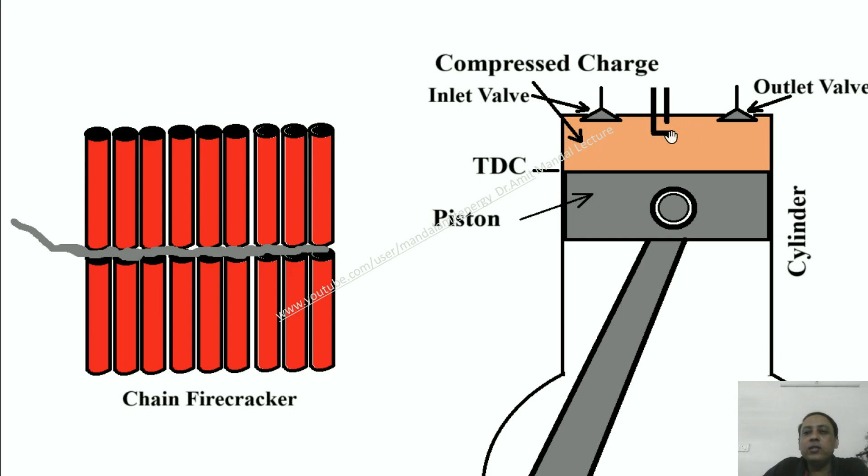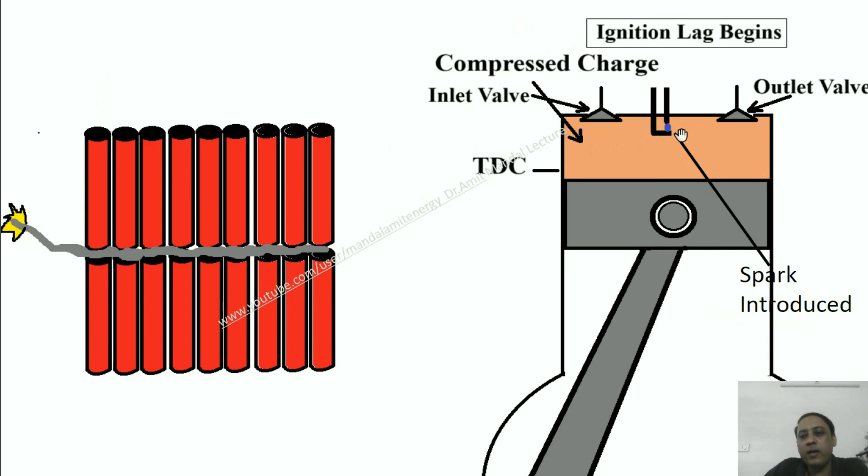You can see that this fuse is ignited and here the spark is introduced. So the flame is going to the first cracker, like saying that initially it was spark and ultimately it converted into a very small flame, and here this first nucleus of flame is developed. So there is a time in between, however that time duration may be of milliseconds. So that is called as first phase of combustion, ignition lag.

Now, why it takes time? The reason being that when spark is introduced, the molecules of air and fuel inside the region of that spark first of all reach the excited state, because combustion is also a sort of chemical reaction, exothermic chemical reaction. So first of all, they will absorb energy, the temperature will rise and they will reach the excited state so that they can chemically combine and reaction could start. So due to that reason, when spark is introduced, the flame doesn't develop at the same time. It takes some time. So that time duration is called as ignition lag. This is the first phase of combustion.

Now what will happen? The crackers will start exploding one by one. Like same, what will happen? Initially it was the nucleus of flame. Now the air and fuel molecules which are surrounding this flame nucleus will get energy from this flame. So they will burn, and then the molecules which are closer to that flame will get energy and they will burn. So like this, a chain reaction will start.

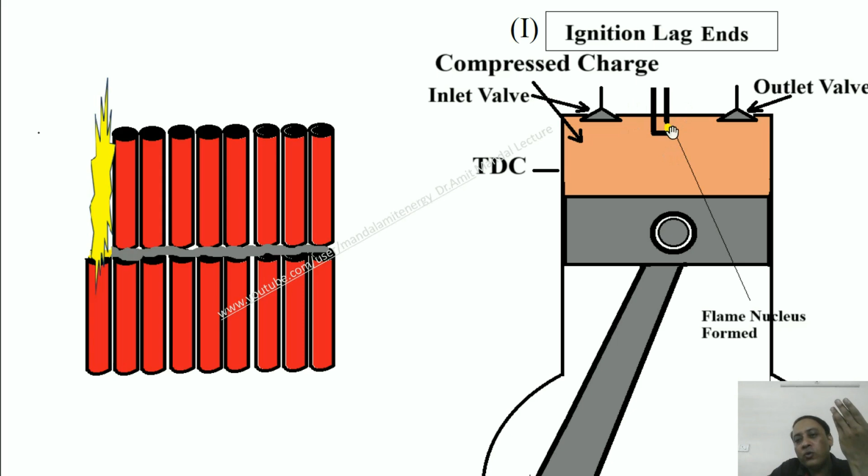So this phase is called as flame propagation. You can see flame is propagating. Like same, the crackers are one by one exploding. The nucleus of flame is now propagating. It is growing big. So this phase is called as second phase of combustion, flame propagation. So ultimately, flame travels through the entire cylinder.

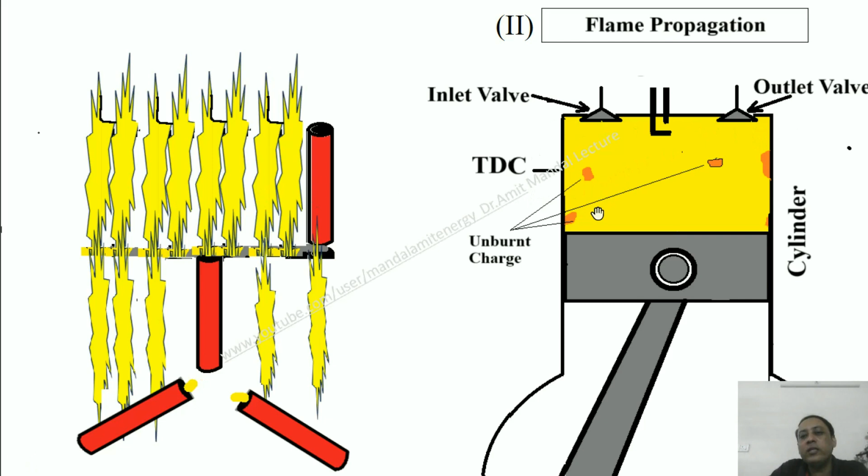Now you would have observed that in the strings of these fireworks, few crackers might be there which did not burn when the entire chain was burning. They burn afterwards. Like same here also it can happen that when flame is propagating, there can be some chunks of charge, maybe small in size. They remain unburnt when the flame was propagating due to known and unknown reasons. Like same as this cracker string, some crackers explode afterwards.

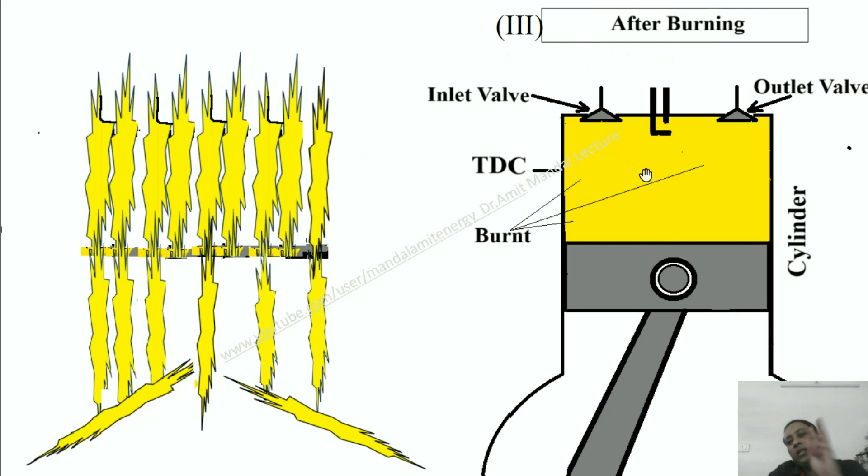Like same here also, when the flame propagation will end, there can be some masses of charge, some lumps of charge which did not burn at the time when flame was propagating. So they will burn afterwards. So this is the third phase of combustion, after burning. You can see the crackers burnt afterwards. So third phase of combustion is after burning. So these are the three phases of combustion in SI engine.

Those are: ignition lag, the first phase, it means spark is introduced to the mixture, however the ignition doesn't start. It takes some time to develop the nucleus of flame. So that time duration is called as ignition lag. Once that nucleus is formed, then that flame starts propagating inside the cylinder. So that phase is called as flame propagation.

But when the flame propagation executes, there can be some lumps of charge which burn afterwards. Due to known or unknown reasons, they did not burn on time. So they burn afterwards. That phase is called as after burning. So these are the three phases of combustion in SI engine; by the help of this cracker analogy, we understood this. Okay. Now, what is knocking?

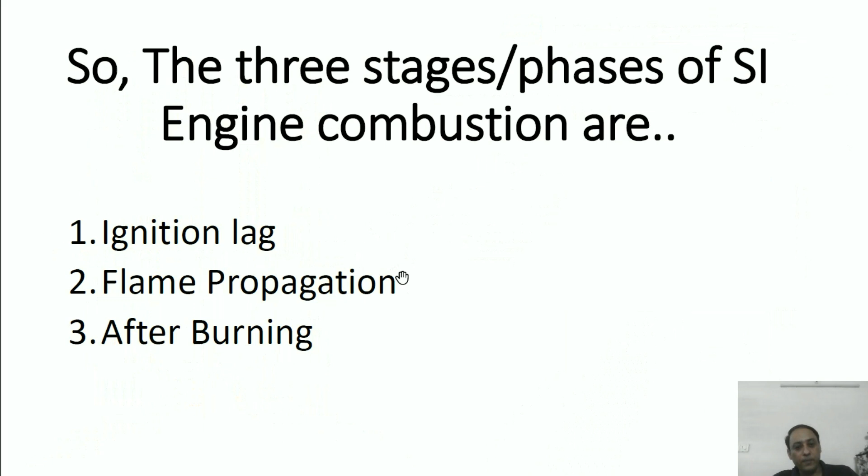This can be understood by this thing that you would have observed in a cauldron while cooking food. In case you are taking the cauldron and putting some oil, and the temperature is too much high, then the oil automatically catches fire. Like same, in case the cylinder temperature is too much high, then there can be some spots where the flame starts developing automatically.

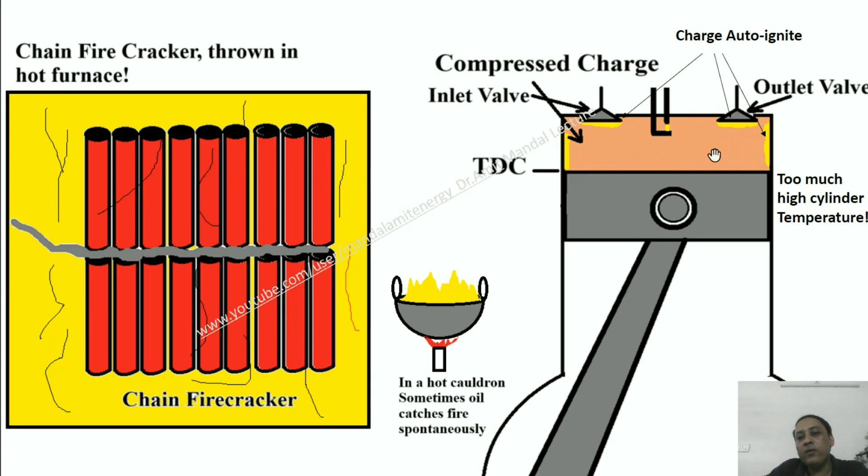Means normally the flame must start from the electrode gap of the spark plug, but due to high temperature, multiple new flame fronts can be developed inside the hot cylinder. You can see this flame front, this flame front, this flame front. Now, what will happen? Multiple flame fronts will start flame propagation inside the cylinder. Means the cylinder inner surface is acting as a source of multiple spark plugs due to high temperature.

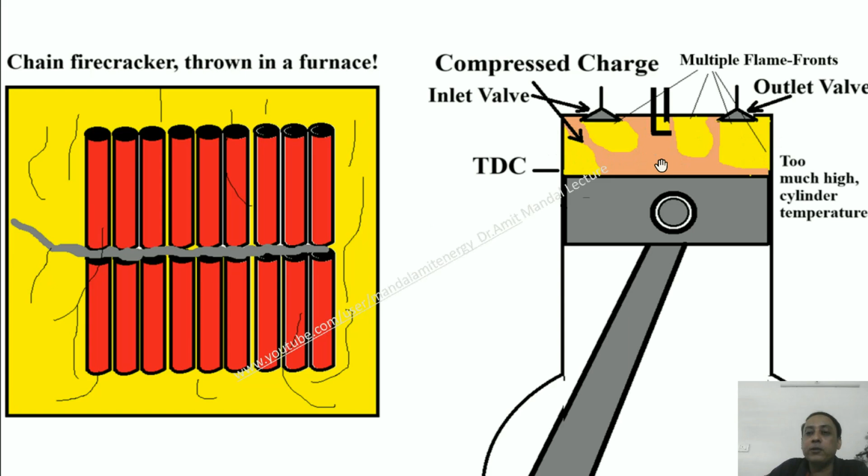So in case many flame fronts travel through the cylinder, then the entire charge will burn at once in a very short interval of time. Same as the cracker string thrown inside the furnace, since all the crackers are at high temperature, all of them will explode almost at the same instant. So what will happen due to this thing?

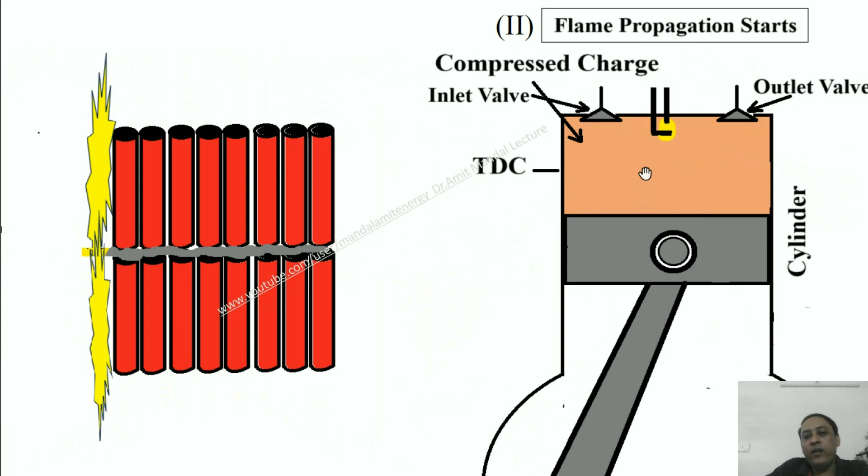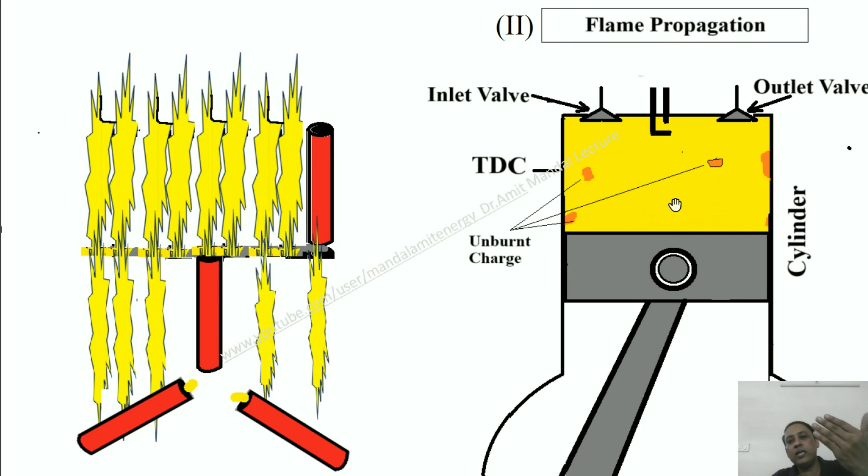See, in normal combustion, the flame travels like this. So when the flame travels like this, the pressure inside the cylinder rises, but the rise is gradual because you can see the flame is traveling with a particular speed. Gradually it is progressing. Okay. So the pressure rise inside the cylinder due to that addition of heat is gradual. But in this case, what happens? The entire charge is burnt in a very short interval of time, maybe 10 times faster as compared to when the flame was normally progressing.

So if the pressure rise is very speedy, it will put an impact on the face of this piston, that is called the piston crown. So this impactful pressure developed on the crown of the piston can develop mechanical stress on the piston, because the piston is normally made up of aluminum alloy which is very soft. So this can shear off the top surface of the piston. So in that case, the engine will fail to work.

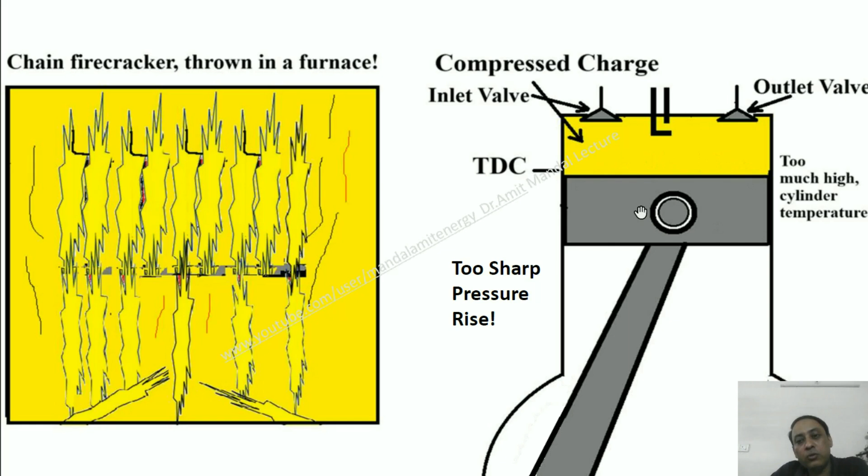So now we will understand what knocking is. See, in normal combustion, the pressure rise in the cylinder will be gradual or smooth. That I already told, that from the spark plug, the flame will propagate and the pressure rise inside the cylinder is smooth. However, knocking is an abnormal type of combustion in which the pressure rise inside the cylinder becomes too much speedy, which can impart shock on the relevant peripherals, especially the piston crown, and can reduce the engine life. It can shear off the piston, it can break the piston like this, so the engine will fail to work.

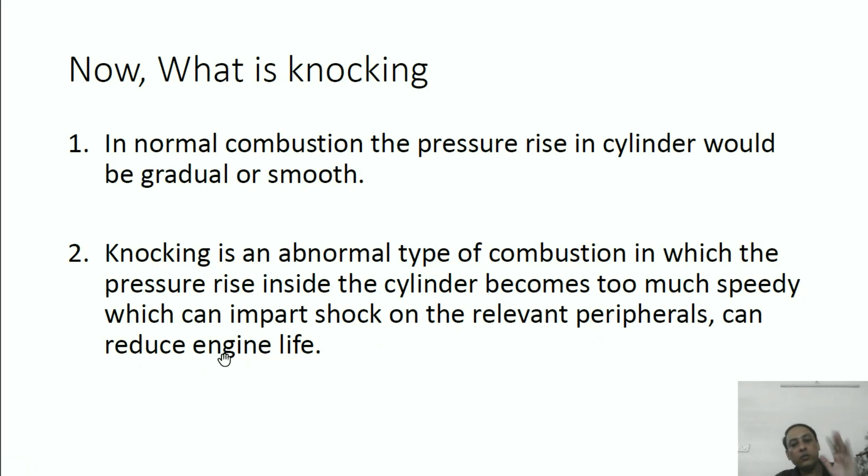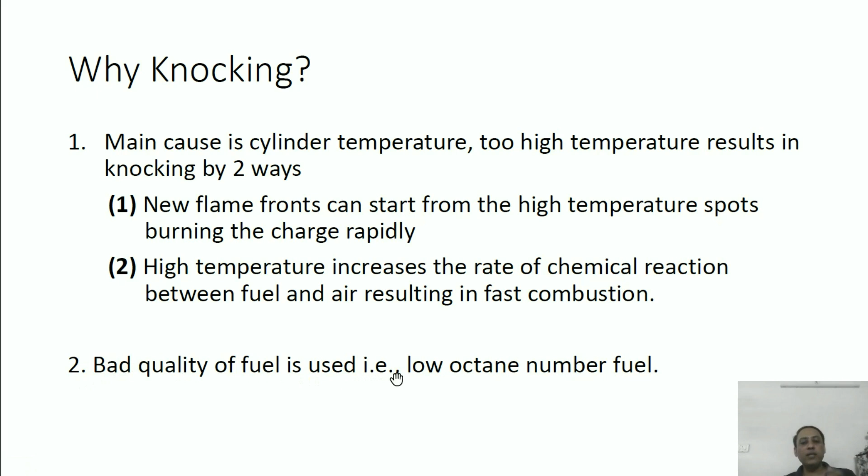Okay. Now, too much high temperature results in knocking by two ways. One, multiple flame fronts will be developed. Second, in case temperature is too much high, then, combustion being a sort of chemical reaction, if the temperature of a chemical reaction increases, the rate of chemical reaction also increases. So by two ways, the pressure rise becomes speedy, so it can impart impactful force on the piston crown. The second main reason is bad quality of fuel, and the quality is determined by the octane number. So in case we are using low octane number fuel, then it can lead to knocking.

Okay. Further, the main cause of knocking is temperature. Then all those factors which control the cylinder temperature will control the knocking also. For example, in case a high compression ratio is there. What is compression ratio? Initial volume of the cylinder, and then after compression, the volume of the cylinder, that is the clearance volume. So V1 by V2. Since compression is adiabatic in nature, a high compression ratio will lead to high temperature rise. Adiabatic compression always increases temperature. So the higher the compression ratio, the higher the temperature rise. So temperature rise will lead to knocking.

Second, high coolant temperature. The job of the coolant is to reduce the cylinder temperature. So in case the temperature of the coolant is already high, how will it cool the cylinder? It can lead to knocking. High charge temperature. Suppose the charge which is pulled inside the cylinder is already of high temperature. If the initial temperature is high, then after compression the temperature is even higher. Okay, so in that case also it can lead to knocking.

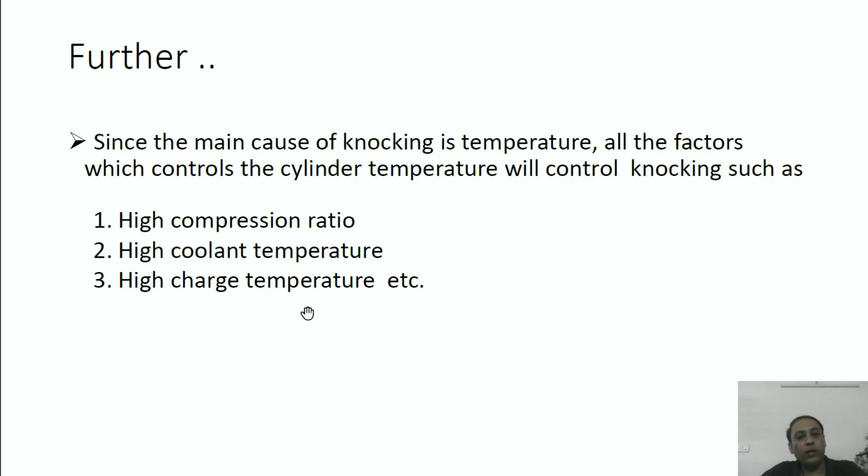Okay, so hope by the help of this small lecture you would have understood the phases of combustion and knocking of SI engine. Thank you.